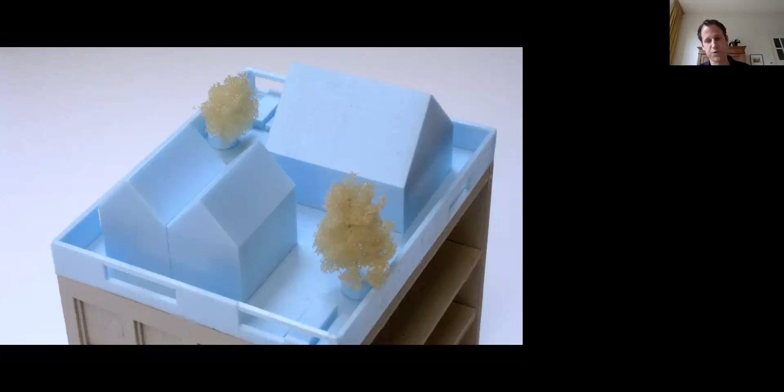However, the strong emphasis on the clarity of the concept also resulted in what I would think is a loss of the experiential and the physical quality of architecture. Architecture lost its relation to the process of making. A building rather resembled exactly what a blue foam model looked like, rather than emerging out of the logic of constructing, and that often became the unnecessary focus of attention.

So I wouldn't say this led me to escape the Netherlands, but I was definitely interested in looking for inspiring places elsewhere. During my studies, I had gone for an exchange program to CEPT, a school of architecture in Ahmedabad in India, founded by Pritzker Prize-winning architect B.V. Doshi. Shefali, my partner, graduated from there.

While in Delft as a student, you were kind of left alone to chart out your own path and explore your own interests. The direct teacher and student experience still existed in this school, and it was really a place where you learned from your gurus, as we say in India. Here, architecture was taught that was contextually spirited, environmentally informed, and structuralist and modernist at heart. But it was also a place that was on the edge of being dogmatic due to its close-knit teaching and learning culture.

While looking for a place where architecture emphasized experience and materiality, an architecture that, instead of calling out for attention, would search for a continuity, we chose to work in Sri Lanka, in the studio of Channa Daswatte, to get a closer understanding of Geoffrey Bawa's work, an architect we really admired.

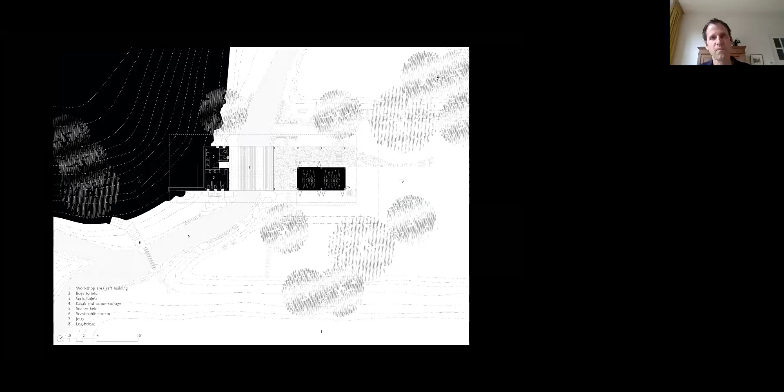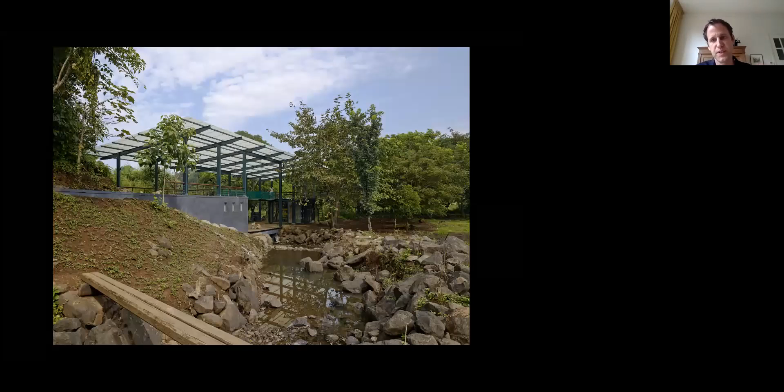These elements are emphasized by strategically placing the various activities of the learning pavilion on either side of the banks of the stream. And then the roof straddles across these different landscapes, tying them together.

The learning pavilion is a building with the purpose of educating children about overcoming challenges in life, and overcoming boundaries, as an extension of the existing challenge course on the campus. Children learn to work with each other in teams to achieve goals.

The space below the roof is open to all sides, and in the summer months, the shade of the roof creates a respite from the heat. A natural breeze flows from the river and cools the covered spaces during the monsoon months.

During these rains, the pavilion really becomes like a dry space to take cover from heavy rains, and the stream below becomes alive.

Often children's play spaces are associated with bright colors, but here we wanted to emphasize the experience of the natural environment. The classroom becomes the outdoors, and nature becomes the classroom.

The Learning Pavilion was a project that resulted from a more traditional model of a client-led architectural commission. The next project is the result of a self-initiated practice.

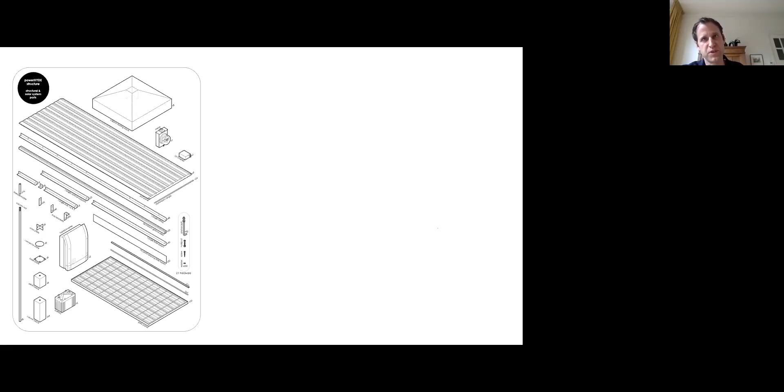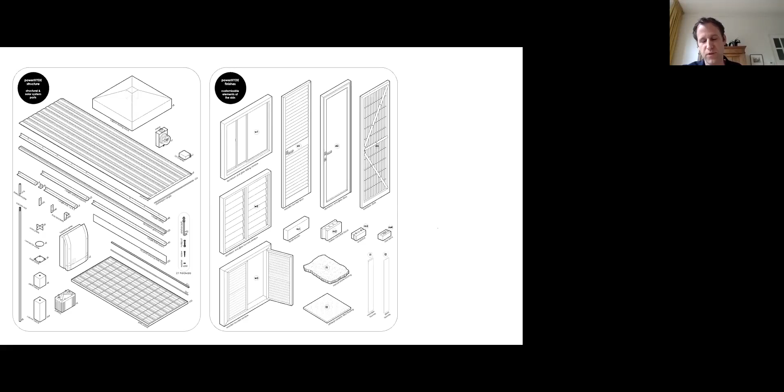We designed a prefabricated building system that can be built quickly with minimal means. 40% of the material is prefabricated to ensure speedy, cost-efficient, high-quality construction. Another 40% allows adaptation to local climates and contexts, such as the plinth, slab, infill walls, doors and windows. The remaining 20% are off-the-shelf products like water tanks, pumps, and toilets that can be procured locally.

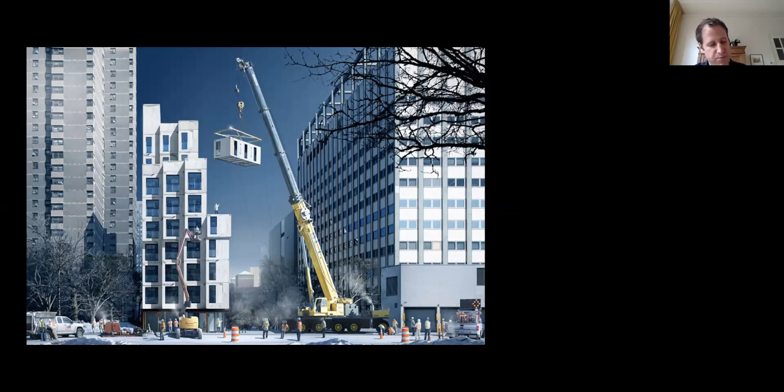But prefabrication is paramount to build at speed and quality, so we had to reinvent this idea of prefabrication. We needed to miniaturize the prefab elements so they could be assembled without the need of a crane.

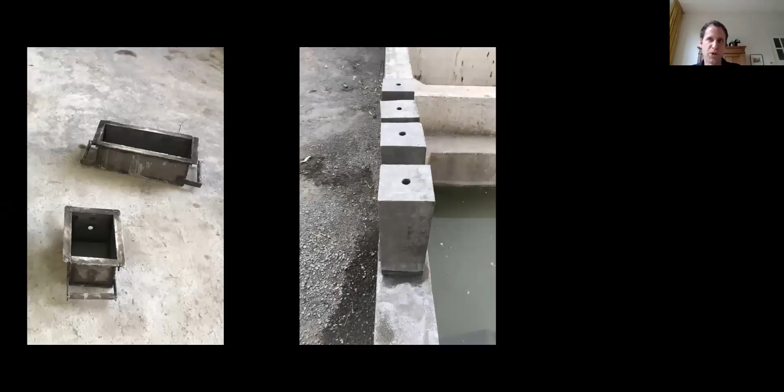The support structure is made of prefab concrete blocks that get bolted together with nuts and bolts on site. We developed a column system made of small blocks that weigh less than 20 kilograms each, so they're easy to carry.

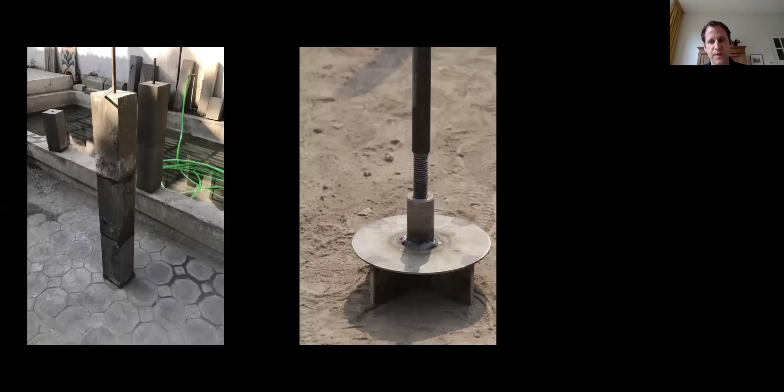The concrete acts as a mass, and then a central rod, which you see here, is screwed to tighten the blocks together and takes all the tension.

And if any of you still remember those little push-up toys, the structural system works exactly like that.

And here we tested the ease of assembly of the system. In one day, all 8 columns were erected.

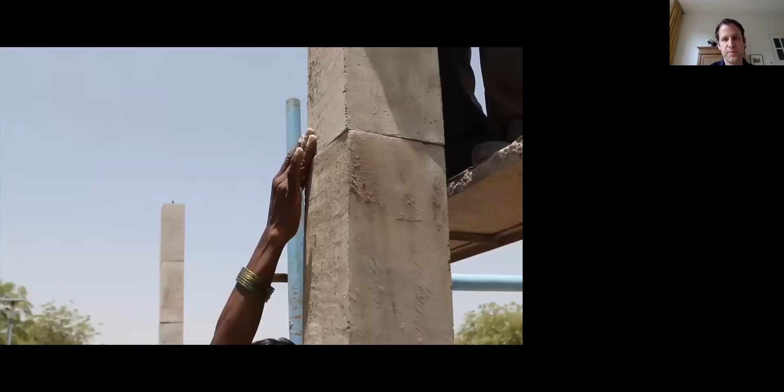Then a connector plate, which you see here, gets screwed onto a female joint and tightens and compresses the concrete blocks. In half a day, the steel roof structure was placed on top of these columns to brace them. And here you see the installation of the solar roof.

And here is the completed prototype house in the village context.

Now this project has huge potential to scale up and reach a much larger number of communities around the world. But what I think is most special about this project is that families in Verrijt will become pioneers towards a sustainable future, actually living in a house that is more future-ready than the houses that we all live in.

So here are a few more photographs of the prototype in Aurangabad.

Apart from generating power, the house also harvests its rainwater. You see the rain chain coming down, and it treats its own sewage water through the reed bed filter that you see below.

Now this is another prototype of Verrijt that we built as a community center in the Philippines, and it is the only structure that has power in this neighborhood. As you can see in the middle of that table, it doesn't only generate income, but also becomes a giant charging station for batteries and mobile phones for all the people living in this community.

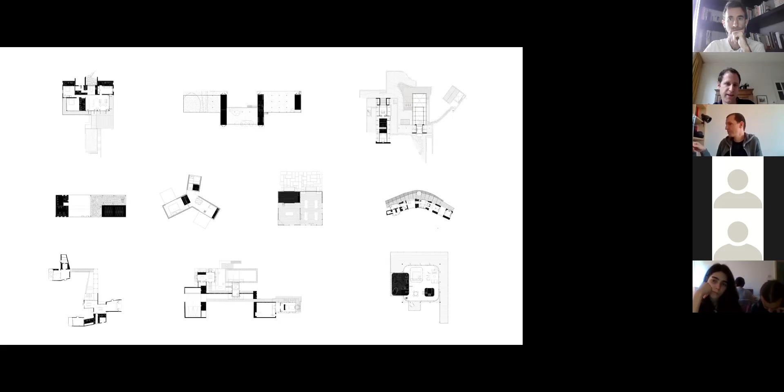It's often an inherent conflict, we feel, between the context and climate of a project and its chosen typological and functional approach, that generates solutions that are unconventional and unexpectedly turn out to be favorable.

So how do we avoid the devastation of a rural landscape by urbanization? How do we deal with this landscape, the home of farmers over centuries, but now the playground of urban citizens? Here in the Western Ghats of India...

East towards the city of Mumbai is located one of our sites. From the hills, numerous rivers and streams find their way down through an undulating landscape, eventually feeding into the Bombay Bay.

We asked ourselves, will we be able to create different relationships between the new settlers and this rural landscape? Can the building be made barely visible? Here, the roof of the house settles just below the top of the hillock. It camouflages itself in the silhouette of the undulating landscape, but also sits just high enough to measure oneself against the landscape and the winding river and mountain range in the distance.

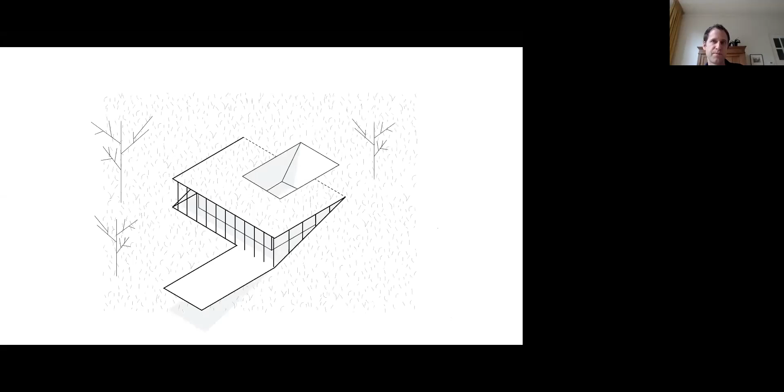And the climate here is unforgiving. Apart from the short winter, it's either scorching hot and dry, or the rain drops down from the sky with tremendous destructive power. What you see gazing down from the top of the hill is just a cover of green, and now it looks very natural, as if it's always been like this.

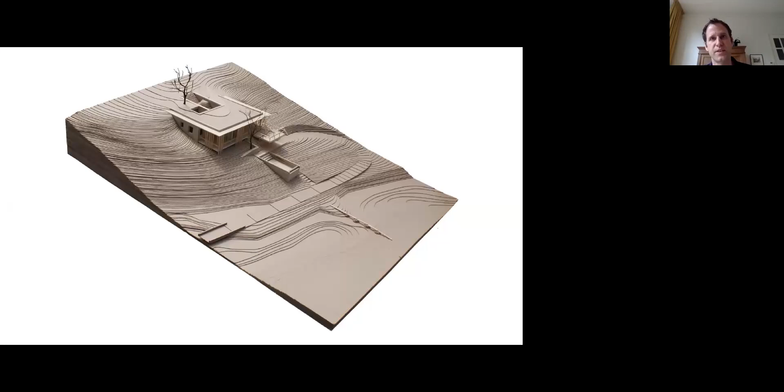But building a house inside a hill has obviously involved quite a bit of groundwork, cutting and filling of land and destroying a part of nature in the process. One may question whether this is appropriate, but we felt that the long-term benefits of this are high.

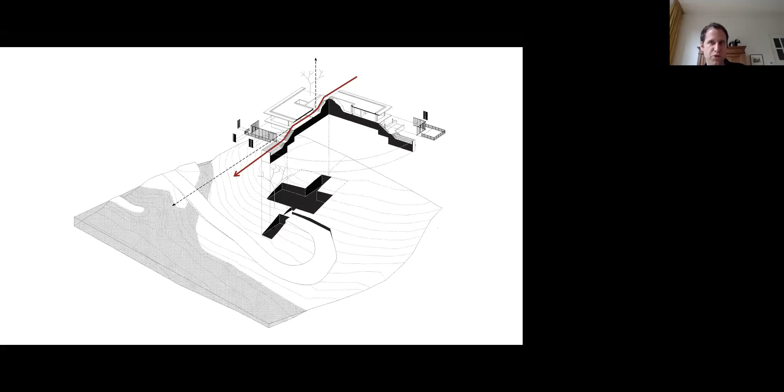An underground house is kept naturally cool. It reduces the requirement for cooling energy, and nature is allowed to take over after completion and offsets this temporary disturbance. A courtyard in the center forges a connection with the sky and then travels through the interior of the house, extending past the pool onto the landscape, tying together terrain and architecture through an experiential movement.

Here in plan, we've highlighted the spaces that are most experienced, the ones following an architectural route, in white, and they get highlighted by emphasizing the black marked spaces that are the servant spaces.

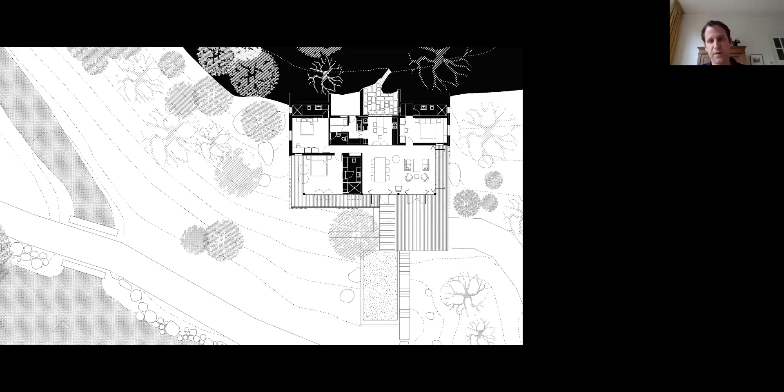The sequence of rock-carved courtyards, kitchen and dining room, veranda, screen, deck, and then the pool, and then the riparian landscape is an experiential one. But it also acts as an instrument to measure oneself against the vastness of space.

The natural landscape changes from a densely bright and green colored jungle-like forest during the monsoon months to a more pale brown shrubby wasteland during the dry and hot summer months. And the plantation of drought-tolerant fountain grasses mitigates this transition to a dry landscape in the summer months.

The veranda is an essential element of life in this climate. And the bamboo screen acts as a filter, but it also creates a sense of privacy.

The building is made to age and weather. There's something sublime about this dramatic collision between the order of geometry and the unpredictability of nature. At the intersection of both, there's a sort of a choreographed ruin or decay, and it meditates upon the inevitability of time and the forces of nature, within which one can find both joy and comfort.

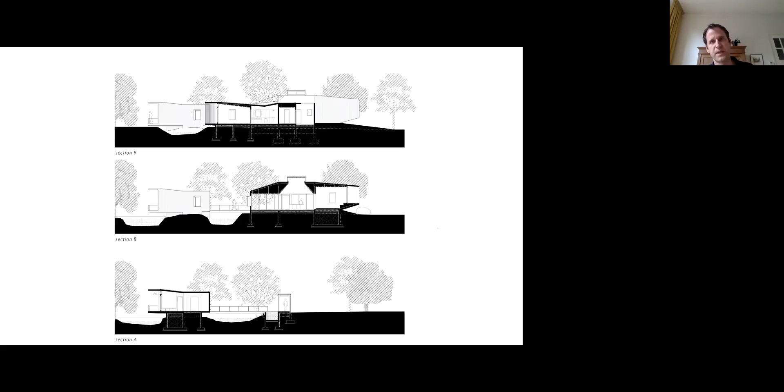And you have the heaviness of the exterior concrete mass, which is reversed by the lightness of the whitewashed walls and ceilings. And then there are large sliding doors which span from floor to ceiling and wall to wall that bring in the outside in the interiors.

And by lifting up the tips of the wings off the ground, the relationship with the landscape is paradoxically strengthened. Here, the contradiction between architecture and nature is highlighted. And the pleasure of the building does not lie in denial, but rather in the celebration of the collision of the two.

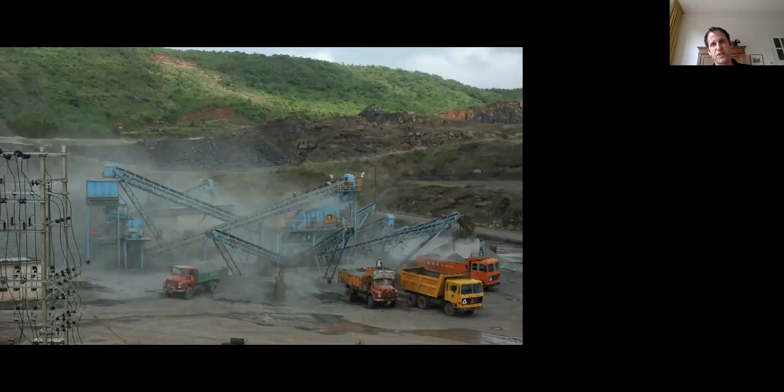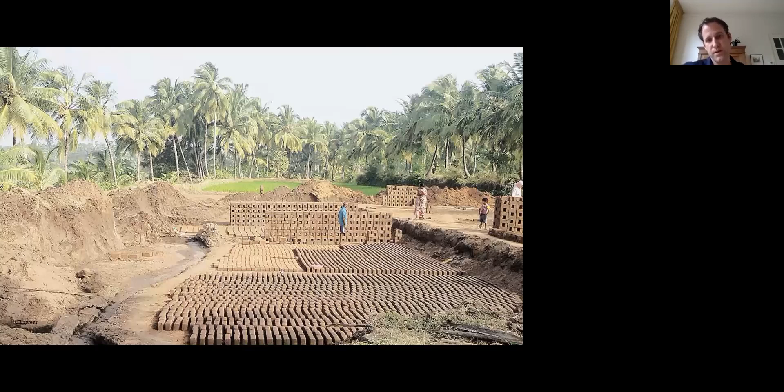Okay, so if we avoid concrete, what about using bricks? Well, that's highly problematic, because for the insatiable requirement of fired clay bricks, fertile farmland is converted to brick kilns. Then you get this, where the land surrounding trees is cut away, eventually killing the trees and leaving fertile lands fallow. But brick kilns are not only destroying fertile topsoil, they also emit black carbon and pollute the air.

Now, architecture is not defined by a singular preference of materials, because we live in an age of scarcity, a depletion of material resources and skilled labor.

The architecture industry is of course deeply responsible in making the situation worse, causing ecological degradation that results from mass extraction of materials. So how do we as architects respond to this? How do we take responsibility? And how do we, for example, empower people at a local level to change their environments and become self-sufficient and work towards a more just and resilient future? What building materials, for example, leave a smaller footprint?

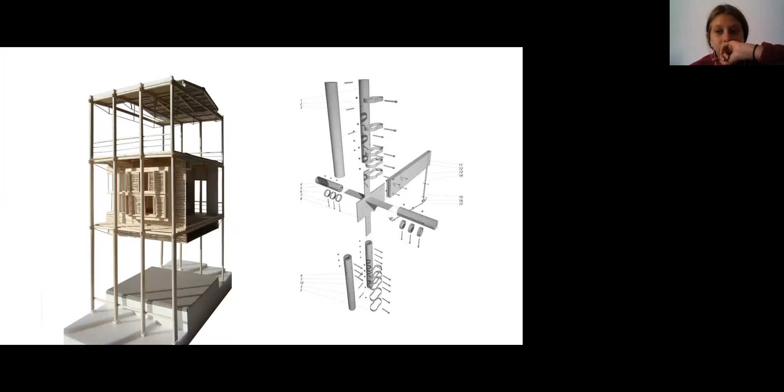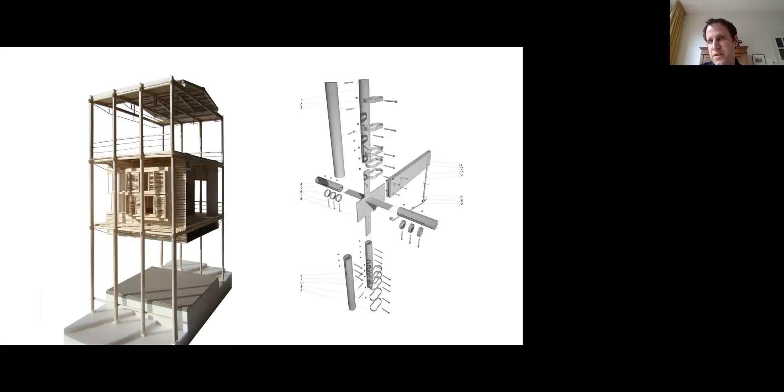Now, going back to 2006, this was actually our first project at the Magic Bus campus that I spoke about in the first project. And it was for a dormitory, completely designed in structural bamboo. But the project failed. It was too early for this in India. The bamboo building industry was immature, and the client really couldn't take the risks, so the project got shelved.

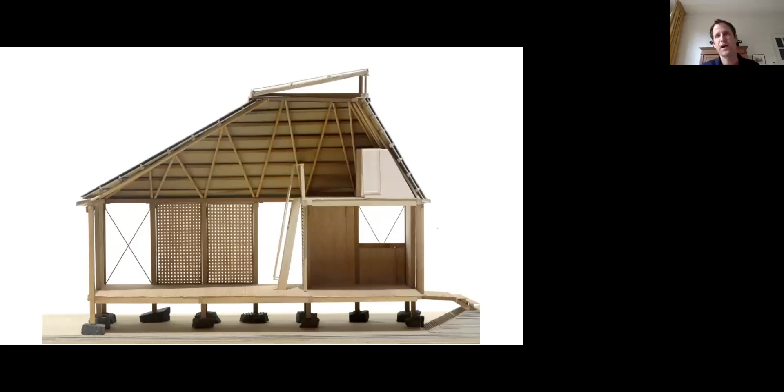But since then, we've started introducing bamboo in projects wherever we can, like in the screen in the riparian house we just saw, and now in the artist retreat in Mumbai.

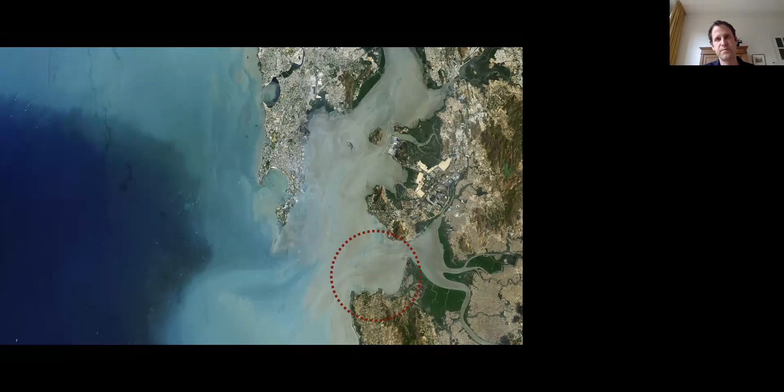Well, you know, on one hand, we could, of course, say, let's just avoid building near the coast, right? Let's not build on this site. But coastal areas are naturally some of the most desirable places to settle, either because of the livelihood or because of the environmental qualities. But can you deal instead differently with the land? And can we build in climate resilience, or use building methods that have less impact on fragile ecosystems, as well as are future ready and could accommodate rising sea levels?

Now, we started this project with digging a water harvesting pond. It actually replenishes the groundwater table with sweet water in the monsoon, and then prevents the site from turning saline in the dry season. You see here on the right a series of pavilions and cabins and workshops placed orthogonally in the grid of the palm tree plantation, with the geometry of the pond as a contrast.

And next to this pond, we propose a workshop building. The plan is really simple. There are two rooms that are defined merely by rows of columns. And then there are two chopped off pyramid-shaped roofs with two skylights that are shifted away from each other, and they define these two spaces experientially.

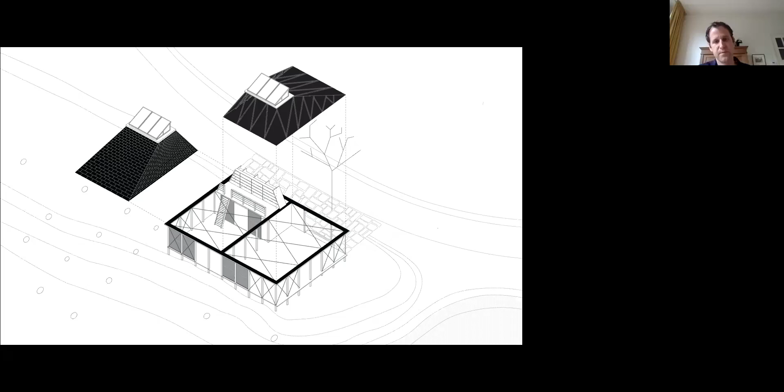Now, this typology is loosely based on this Ambalama in Sri Lanka. To me, it's one of the most beautiful public infrastructure projects of the early 19th century. It's sited on a modest rock outcrop, an island amongst a sea of paddy fields. And pilgrims, traders and travelers from all over South Asia gathered in these rest stops to rest, meet, and share stories with each other.

The structure delicately balances on 4 boulders of around 800 millimeters to 1 meter in size. The height of the boulders carefully levels the difference between the slope of the rock surface and the horizontal plane. And then there are 4 large rectangular shaped tree trunks that overlay like puzzle pieces into each other to form the support of the superstructure. It also functions as a bench to sit on or sleep on.

Space, functionality, tectonics, materialization, and structural essence all converge here. It is heavy and down to earth, but transparent and light at the same time. The spatial quality of this emblem is one of continuity, while being anchored and rooted to its specific location.

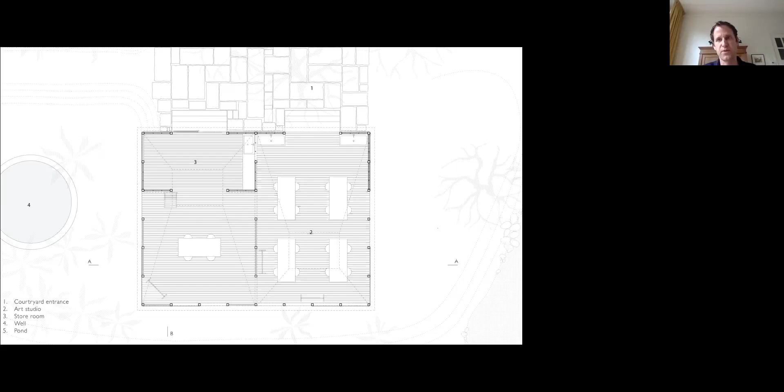So here you see the plan of the artist workshop. It's a 12 by 9 meter tropical shed in a grid of 1.5 meters with a 6 meter high roof. The stilts, columns and beams are made in galvanized steel. The roof structure is built of bamboo V-shaped rafters, covered by a lightweight sandwich roof. Then a solar skylight on top of the roof pulls up hot air from the space below and encourages a natural flow of air across the workshop.

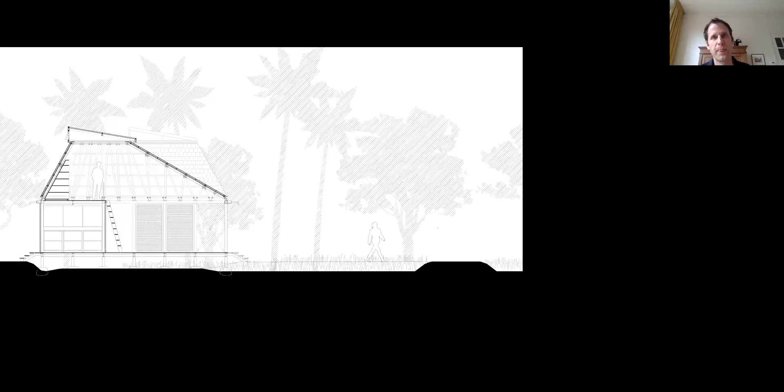The skylight brings in light, but it also generates power. And the otherwise distracting solar panels are integrated into the roof design.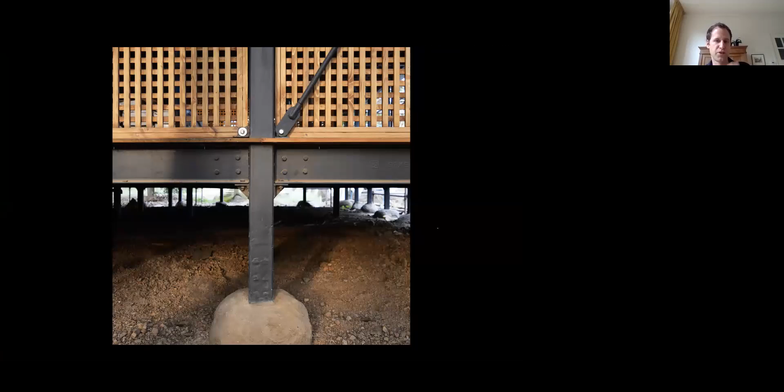Because regulations don't allow us to build permanent structures near the coast, and to reduce the impact of these structures on the site, the steel components are completely manufactured off-site. Hereafter, they are assembled with nut and bolt connections on site, allowing them to be dis- and reassembled elsewhere. You see here the bolted connections, and the structure is placed on these large stone boulders, which form the foundation of the structure.

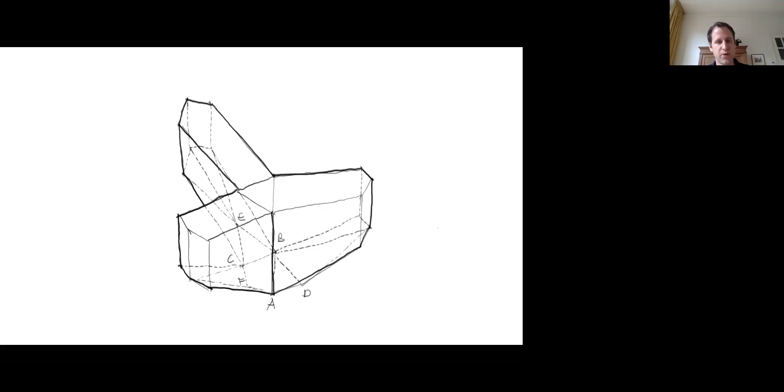The cabin has a floor area of 40 square meters, and each wing contains a different program. Now, this Y-shaped typology is not often used in architectural history. It is mostly used in neutral schemes that are either extremely introverted, like prisons, or in anonymous directionless apartment and office blocks with a focus on efficient circulation.

However, here the typology is chosen to enable us to focus on three distinct horizons: a day room with an inbuilt sofa and tiny breakfast area on the bottom right.

It stares at the valley below and the projecting rocks. Then on the top, on the north, a compact bathroom opens towards the immediate forest. And the bedroom you see on the left orients towards the Himalayan mountain range.

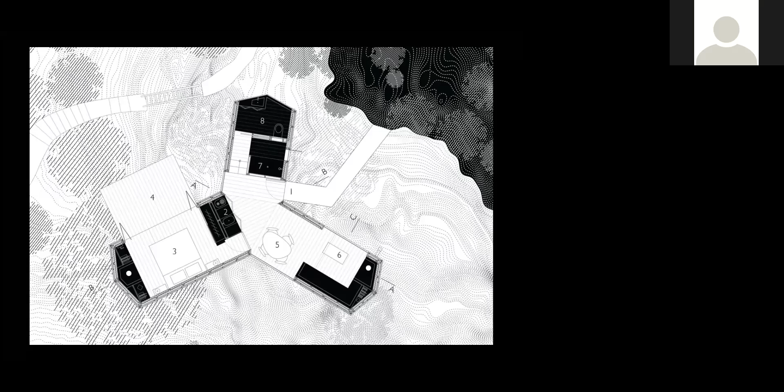A small pantry is located in the central triangular space, and the end of each wing contains a fireplace inside a cabinet. All these cabinets and storage spaces are built in to make optimum use of the space and to emphasize the framing of views.

The mountain cabin offers the basic comforts of a home, while providing a rustic experience of mountain life. In the living room wing, a loft space creates another sleeping space on top.

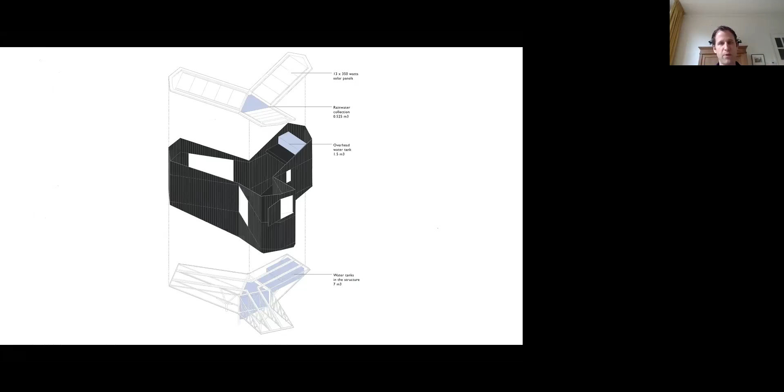This mountain cabin is designed to be autarkic. All three roofs are filled with integrated solar panels to provide its own power, and the roofs slope inwards to the center to harvest rainwater, which gets stored in the hull below the floor, between the floor and the foundation. While avoiding reliance on external resources, it prevents any damaging impact on the sensitive ecological habitat it is nestled in.

Now, of course, building this is going to be a challenge. The line-out alone is full of improvisations. How do you measure two column positions with a very specific horizontal distance on a 45-degree slope, with the abyss staring up at you?

So we decided to do a first, rough line-out, so we could at least confirm whether what we observed in our digital models matched the site conditions. And you can't just drill into the rock to place marking posts, so each team member you see here becomes one marker.

How do you build this when you don't have a stable ground to work on? We decided to build first a platform of steel tubes and angles, working from the center outwards, and then the wall panels and the roof can be installed from this platform.

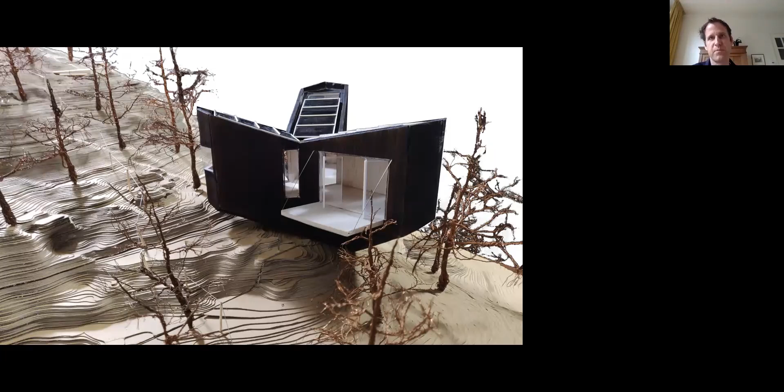The most economical material that can be carried over a forest path by people and mules is timber, so the framework is made in pine timber. The forest this is located in is prone to forest fires—these pine trees have a high resin content that is harvested, but it also catches fire easily. So the cladding will be made of toon, a local cedar wood that is charred to make it fire resistant.

The cabin is, in a way, a device to observe the dramatic and rugged mountainscape of the Himalayas. We need to embrace nature, accept its unpredictability and uncertainty, and take it up as a challenge. In our work, architectural typologies and landscape strategies go hand in hand to enhance and anchor a building in its context.

But I do hope I've managed to show in the previous project that contextual and environmentally sensitive design does not mean that one always needs to take what one sees at face value. It does not always mean that one has to tread lightly and treat the given as sacred. With these projects, we do not attempt to domesticate nature, nor do we attempt to naturalize architecture.

We search for just the right amount of confrontation and equilibrium between natural processes and architectural permanence—a stage to experience time and place. It is this duality, understood within the context of a world that we feel is out of balance, and our desire to continue creating characterful, responsive, experiential and contemplative environments, that keeps us exploring within ever-shifting positions.